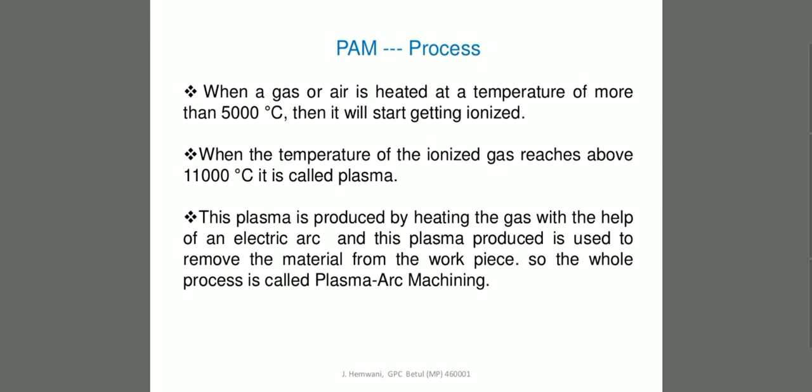Now this is the working principle of plasma arc machining. Before seeing this, let us see the schematic diagram of plasma arc machining. Let us start from the workpiece material.

can form the plasma. That plasma is directed by the nozzle, where unwanted material can be removed. So this is the construction of the plasma arc machine. Let us go in depth into plasma arc machining.

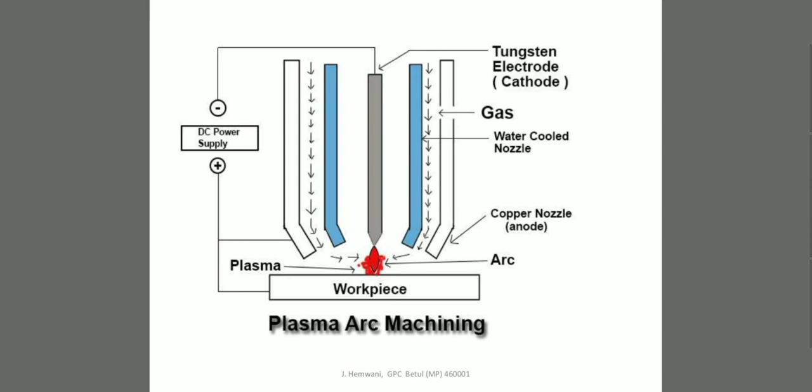The required mixture of the gas is supplied to the gun, and a strong arc is produced. As I told, the inlet area is provided here. From this gap the required mixture enters and it can go and reach the arc, so that the strong arc is produced between the anode and cathode.

There is a collision. As I told, the gases come from the outer source, reach the inlet portion of the plasma chamber, pass through the gap between the chamber and the cooling jacket, and reach the arc. When it reaches, there is a collision because the spark is already generated between the electrode and workpiece material.

So when the gases are coming and touching the spark, the collision will be taking place. That collision is held between the electron of the arc and the molecule of the gas. Due to this collision, gas molecules get ionized. This is happening up to a certain temperature and the heavy potential difference of the DC supply.

When gas reaches the arc, the potential difference of the DC supply may vary and may be increased. When it is increased, the plasma will come out from the collision portion of the gas, which is ejected from the nozzle and directed onto the workpiece material at very high velocity.

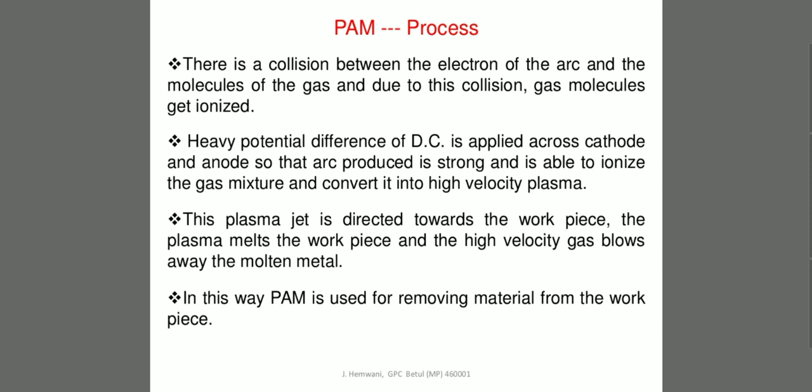See the second point: a heavy potential difference of the DC supply is applied across cathode and anode, so that the arc produced is strong, able to ionize the gas mixture and convert it into high velocity plasma. This plasma is directed towards the workpiece. The plasma melts the workpiece and the high velocity gas blows away the molten metal. In this way, the plasma removes the unwanted material from the workpiece.

Due to the high temperature generated from the arc, the collision happens. The gas is touching the spark, the collision is held between the anode and cathode, the plasma gets generated, that plasma is directed through the nozzle and the unwanted portion is removed.

Due to the high temperature generated from the arc, electrons from the atoms will be displaced, atoms are ionized and the gas turns into plasma. I have already explained that, I am telling it again. As the gas is ionized, a large amount of thermal energy is liberated.

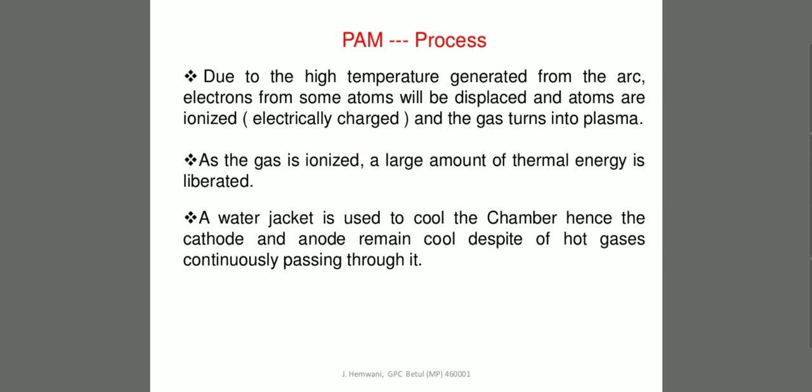The major thing is the water jacket. Why water jackets are provided in plasma arc machining: high temperature is generated, and sometimes the material may get damaged due to that high temperature. In order to avoid damage, the water jackets are provided over the tungsten electrode.

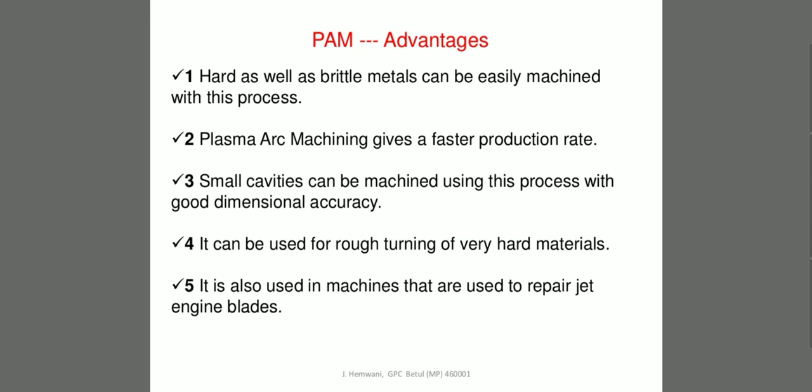The advantages of plasma arc machining: hard material can be machined, either brittle or ductile, anything can be machined, but it should be electrically conductive. Plasma arc machining gives a faster production rate. Small cavities can be machined. It can be used for rough turning also. It is also used in machines that repair jet engine blades. These are the advantages.

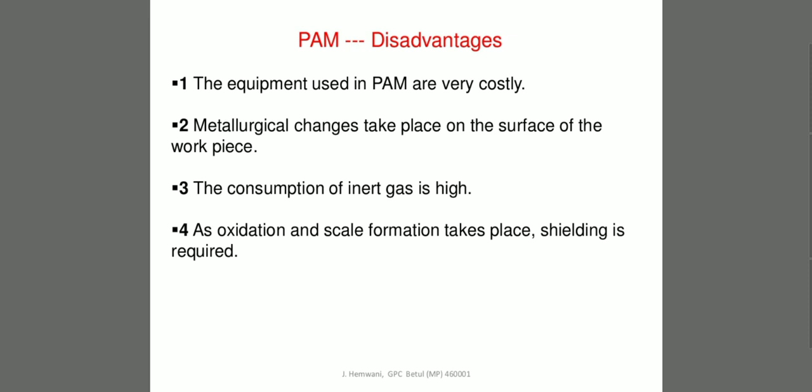Now see the disadvantages. The equipment cost is very high. Metallurgical changes may take place. The consumption of inert gases is high. Oxidation may happen. Due to oxidation, metallurgical changes can also happen.

The applications: plasma arc machining is used in nuclear submarine systems, welding rocket motor cases, and profile grinding. Wherever fine machining is needed, plasma arc machining has been used.

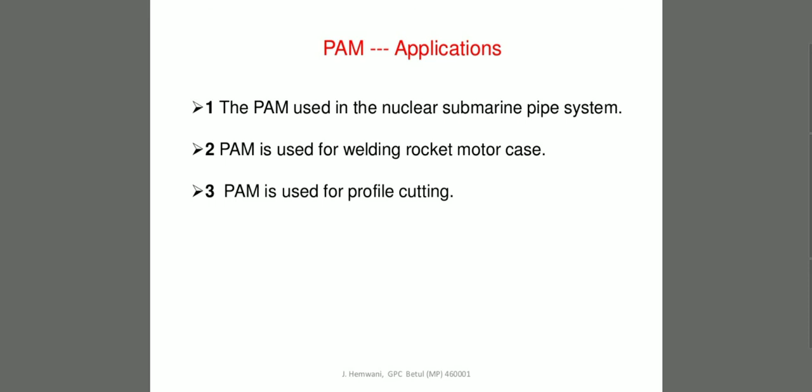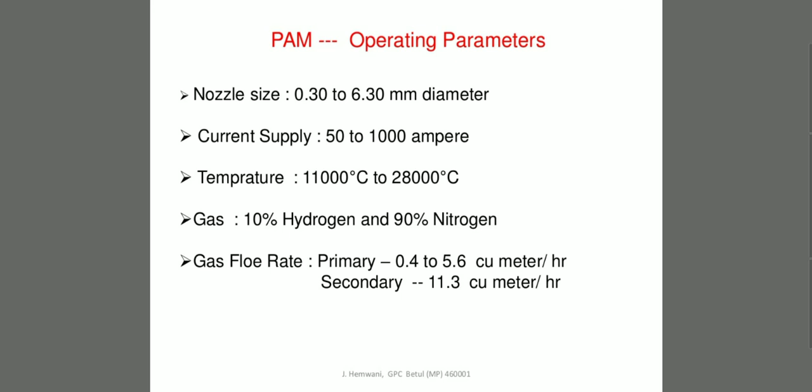Primary gas flow rate will be 0.4 to 5.6 cubic meter per hour. The secondary, 11.3 cubic meter per hour.